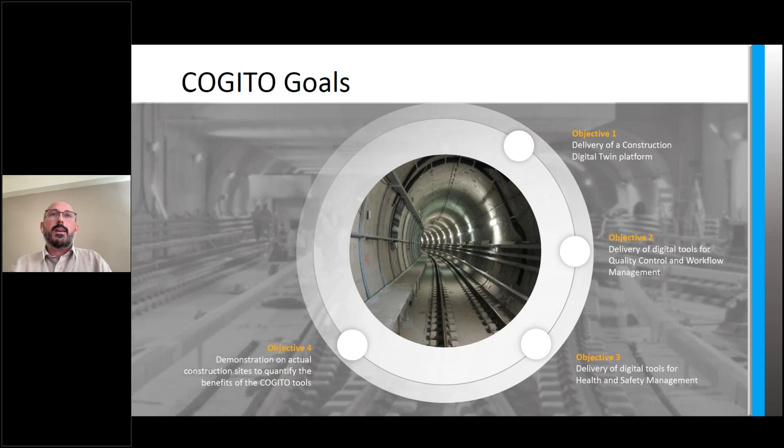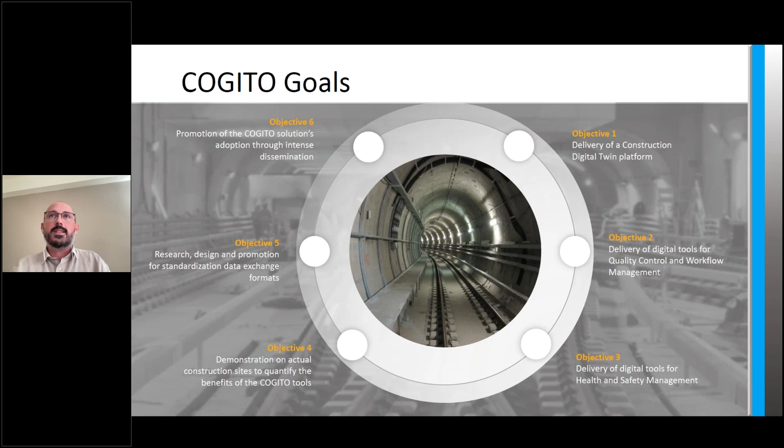Our missions have been to craft a digital twin platform powered by AI-driven quality control, workflow management, and health and safety digital twin applications, to demonstrate them on actual pilot construction projects, to pave the way for compliance with industry standards, and to extensively disseminate our achievements. To that direction, the conceptual COGITO architecture was developed. So let's delve deeper into the COGITO solution.

Actually, the COGITO solution hinges on several key components. The COGITO Digital Twin platform in the middle, which is the cornerstone of our system that masterfully manages data in adherence to the COGITO data model, ensuring seamless semantic interoperability among the various digital twin components. The multi-source visual and IoT data pre-processing modules on the left that transform raw reality captured data into curated information that is stored in the digital twin platform.

And on the right, the health and safety services that generate hazard detection rules based on design and planning, also issuing timely warnings to construction workers and equipment operators using real-time data. The quality control services which retrieve both as-designed and as-built data from the digital twin platform, expertly detecting defects and discrepancies using advanced algorithms.

The workflow modeling, simulation and management services that monitor and optimize construction processes in terms of cost and time. And last but not least, our rich graphical user interfaces and supporting applications designed to empower decision makers and streamline progress reporting for all stakeholders.

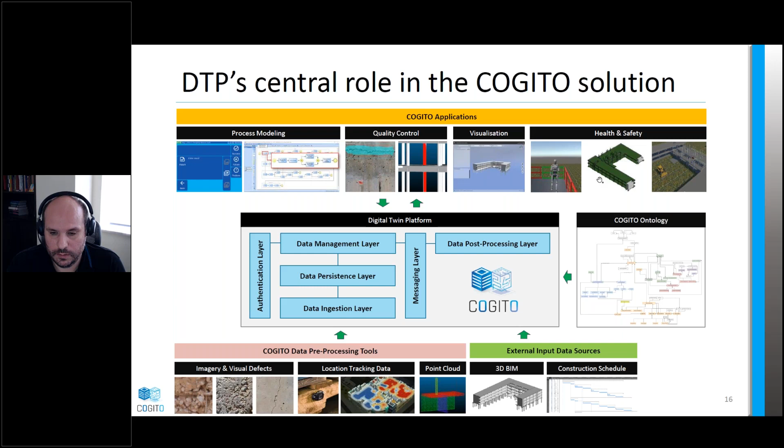So on the next slide, the overall architecture, as I said, has 6 core layers. Each layer contains software components. Here, the important thing to mention is that some of these components are standalone applications, but in the data management layer and in the data ingestion layer, we follow the microservice architecture. And in the data post-processing layer, through the messaging layer, we implement the service-oriented architecture in order to communicate with the COGITO tools.

The digital twin platform offers graphical user interfaces for users that have different roles in the COGITO solution. For example, the COGITO tool developers have access to the digital twin platform in order to register their own applications, to configure the APIs of their tools, and also to create, configure and orchestrate execution of the internal services, model checking services and data transformation services that the DTP offers.

Also, the project managers have their own access to the digital twin platform in order to create projects, to configure the projects, to assign users to the projects, and to load the input data. For example, as I said before, we have the BIM model, we have the construction schedule, we have IoT data coming from the construction site. So the project manager has the responsibility to load all this data into the digital twin platform.

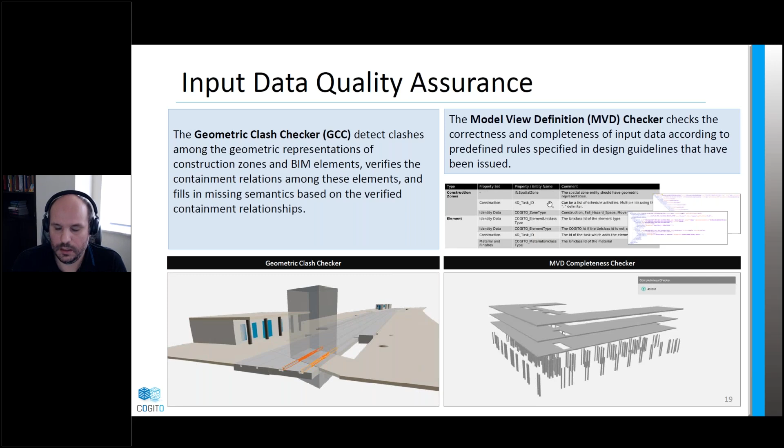The digital twin platform also offers a set of data transformation services. We have internally built an IFC optimizer that reduces the size of the BIM models, and this is super important when we have to deal with large models, because we can speed up the execution of all the data transformation processes and model checking processes.

We have also a B-Rep generator component that is responsible to create triangulated representations, geometric representations of the BIM elements. And this is important because we also offer in the COGITO solution connectivity with AR headsets such as the HoloLens, and it's important to have an optimized way to visualize the geometry in these devices.

The digital twin platform also offers a knowledge graph generator, an internal component responsible to transform all the input data, the BIM model, the construction schedule and this information into the knowledge graphs, and also to create the thing descriptions that are stored in the thing description directory. We have this technology that follows the Web of Things specification.

And finally, the BIM management component is a service that is built inside the digital twin platform and is responsible to provide the functionality for serializing, deserializing, querying, merging, splitting, and manipulating BIM data in general.

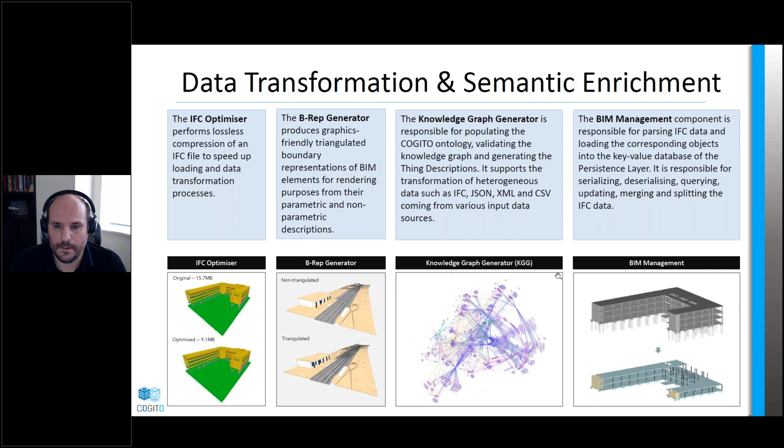Now, about the data integration and interoperability problem, the digital twin platform offers an extended way that we can configure our own scripts. So the digital twin platform offers a DT library that contains a set of reusable ready-made blocks, scripts, that are registered through the graphical user interface, and then the COGITO tool developer can create the modules based on these actors. So with an empty canvas, she can drag and drop actors in the module design platform and configure all the routes and the business logic of the module.

So this is, I think, the last slide. We can switch to the video for the demonstration. Yes, one moment.

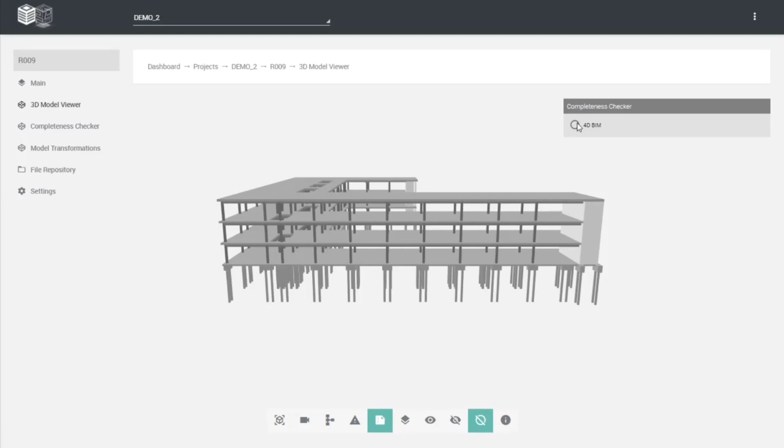When the annotation is finished and the execution is triggered through the status update, the DTP checks the quality and also transforms the data to the graph, RDF data, and also updates the graph. And here we can see a model checking. So we provide an error report for the elements that have missing properties. And this can help the designer to go back to the BIM authoring tool in order to update the properties.

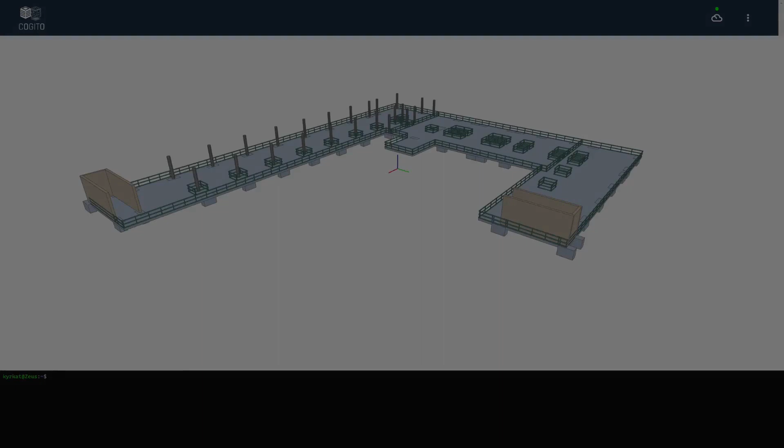Here are more complex modules. For example, this module is responsible to generate an IFC snapshot, a smaller IFC that contains only elements that are active for a specific period of time, that have active tasks. So applications such as the AR device, Unity applications that are installed in the AR devices, send to the DTP a time range, and then the DTP on the fly generates an IFC file, a BIM model that contains only the active elements based on the input time range. So this is an output, as you can see here.

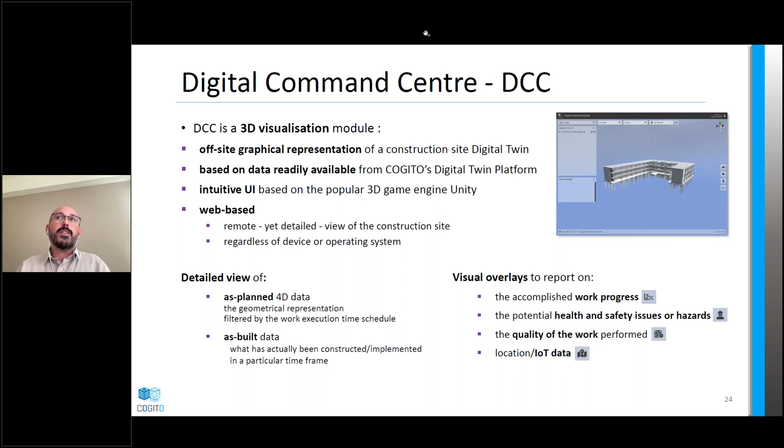DCC also offers visual overlays that report on crucial project aspects, including work progress, potential health and safety concerns, the quality of work, and location/IoT data. This means that the user can monitor and manage the construction project with precision, efficiency, and safety in mind.

Upon successful login and project selection in DCC, which we'll see later in a video, the user is presented with the main application layout as depicted in the left side screenshot of this slide. The main UI components available to the user are the filtering bar, allowing the application of filtering criteria, namely time interval selection for the as-planned and as-built data. The camera widget assisting the navigation of the user throughout the 3D model.

The element tree panel listing all elements available in the BIM in two alternative hierarchies. The element details panel populated upon BIM element selection, providing all available data properties and attributes for the specific element. The overlays selection, allowing the user to visualize available metadata on top of the rendered BIM elements. And the status bar providing information about the connection, the logged in user, and the DCC version that is running.

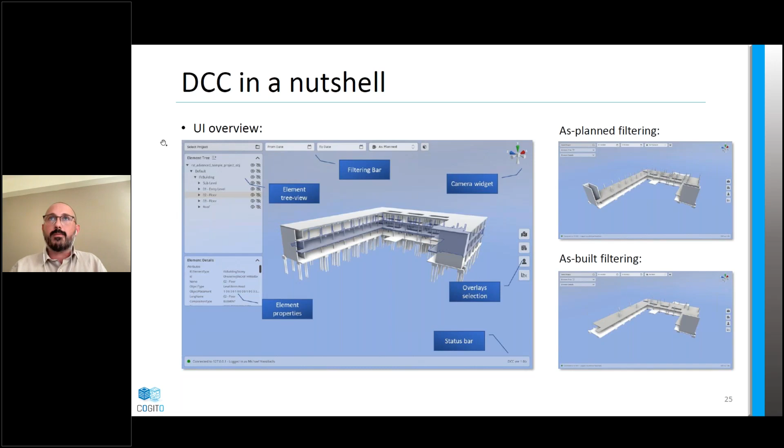The overlay selection buttons allow the user to enable or disable each of the four foreseen available layers corresponding to the data generated by the relevant digital twin applications and stored in the digital twin platform, namely the work progress COGITO tools, the IoT location data pre-processing tools, the quality control tools, and the health and safety tools.

The quality control and the work progress overlays have been discussed and presented in previous webinars, where the quality control overlay allows the user to visualize the results obtained via COGITO visual and geometric quality control tools, while the work progress overlay provides a quick, straightforward visualization of the project's current construction status. Upon application of that overlay, the project's BIM elements are color-coded according to their construction progress. The video that follows today focuses on the health and safety and the IoT overlays of our solution.

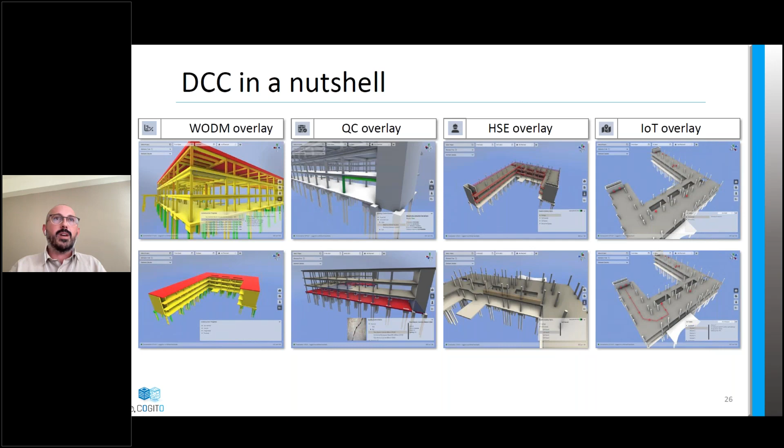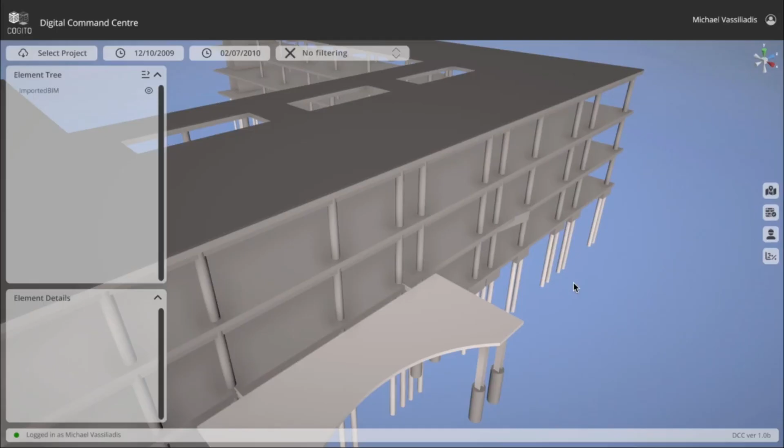The journey in DCC starts with a login modal window where the user enters his or her credentials. Then the user selects the project that he or she would like to view, and the DCC application starts executing the required conversion reporting operations. Upon successful login and project selection, the user is presented with the main application layout, where he or she can zoom in, zoom out, or rotate the building rendered geometry.

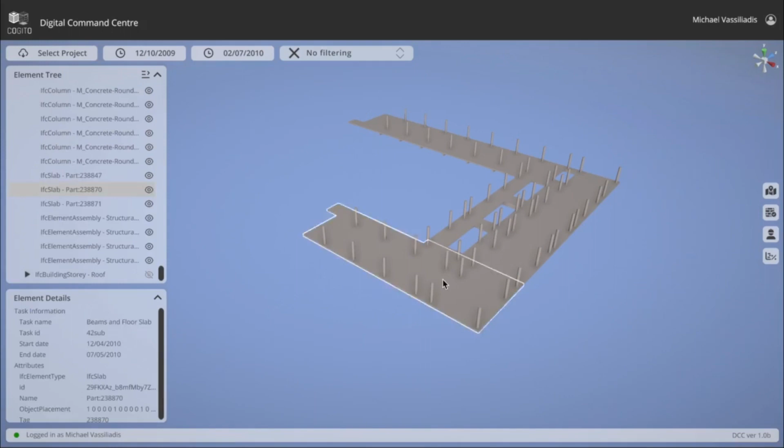A camera widget is always available at the top right corner of the screen, where, for example, clicking on the x-axis moves the camera to a side view. The element tree view on the left panel provides a hierarchical view of all elements grouped by story by default, and each item or group in the tree view has separate show or hide controls in the form of an eye button. Clicking those buttons hides or shows the corresponding elements in the 3D scene.

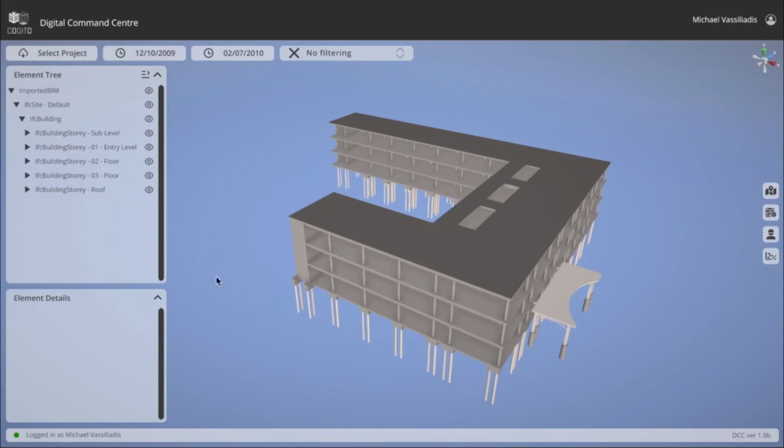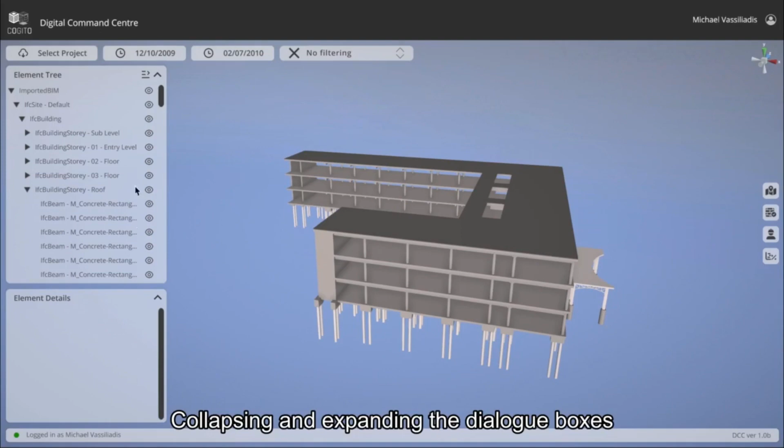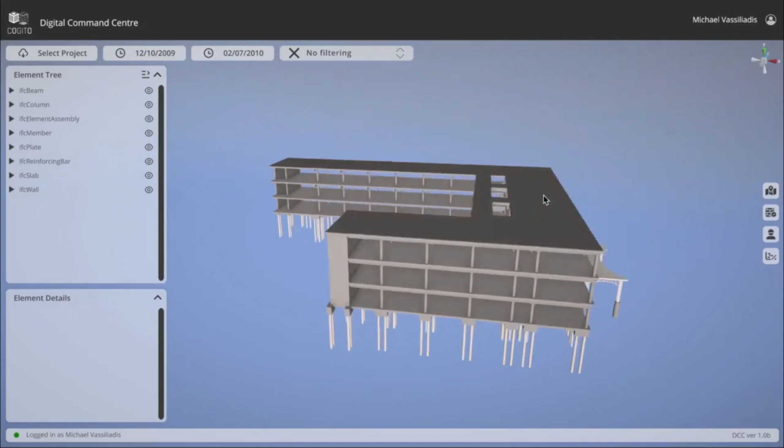Selecting an element, either by clicking on an item in the tree view or using the mouse in the 3D scene, will populate the element details panel. The latter includes a property table with all available attributes and metadata linked to the particular element. To avoid cluttering the UI, the element tree and element details panels can be collapsed or expanded as per user preference. The element tree panel also provides an alternate grouping mode by element type, where the user can toggle between the two modes using the header button. The expanding, collapsing, and showing, hiding functionalities remain the same for both grouping methods.

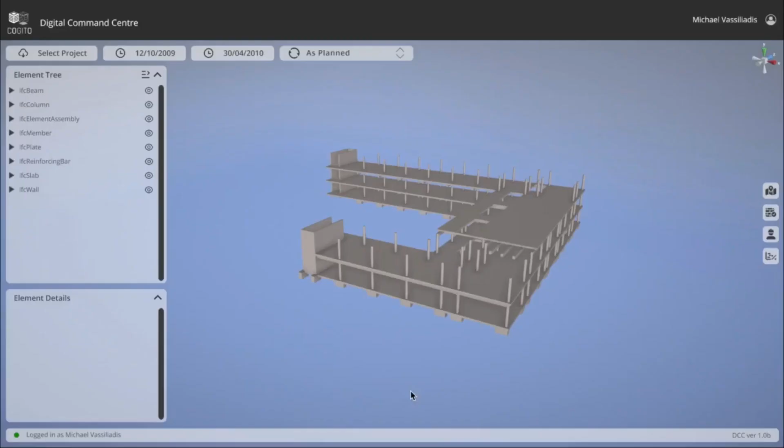At this point, I would like to mention that upon project initiation, no time filtering is applied. However, the user has the option to filter the displayed elements by date range, setting the start and the end dates, and selecting the as-planned data filtering to be applied. Changing the start or end dates, only the elements that have their as-planned dates within the selected range are shown.

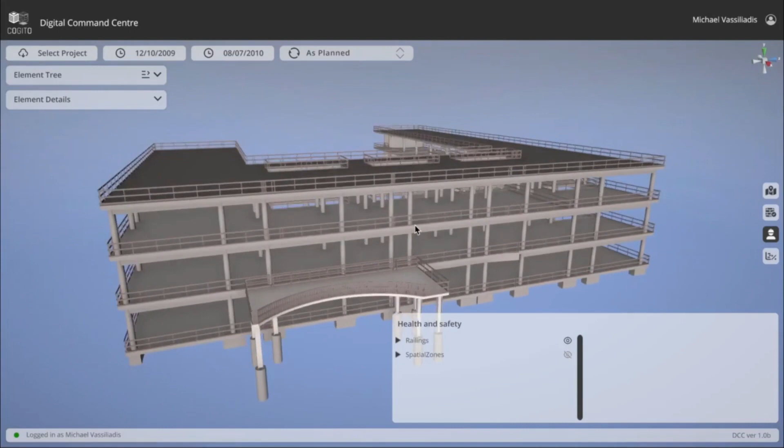For the health and safety overlay, actually, it makes use of the enhanced BIM file generated by another COGITO Digital Twin application called SafeCon AI and stored data in the Digital Twin platform. The relevant data fall under two main groups, safety elements like railings and safety zones that can be hidden or unhidden using the eye button.

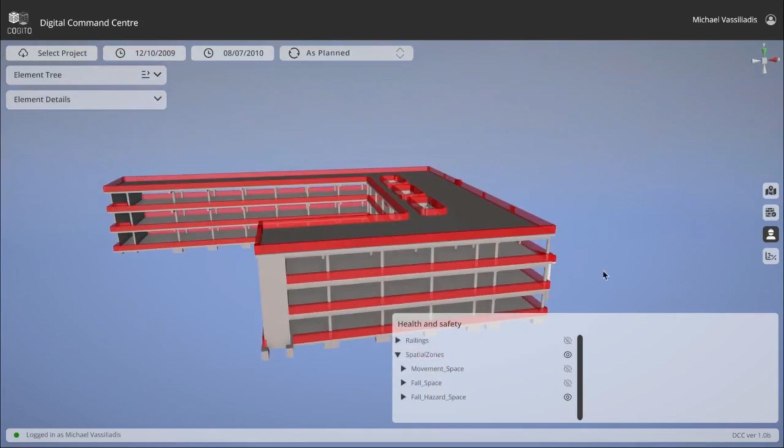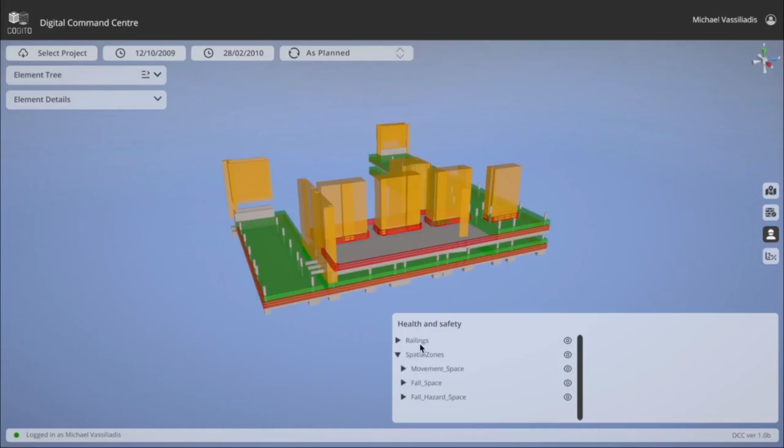The user can browse a list of various safety-related zones and visualize them that are further grouped into three main categories, namely the potential movement spaces, the fall spaces, and the fall hazard spaces. Upon their selection, they are rendered as rectangular bounding boxes that include the area of interest. As planned or as built time frame filtering could also be applied here, as we see.

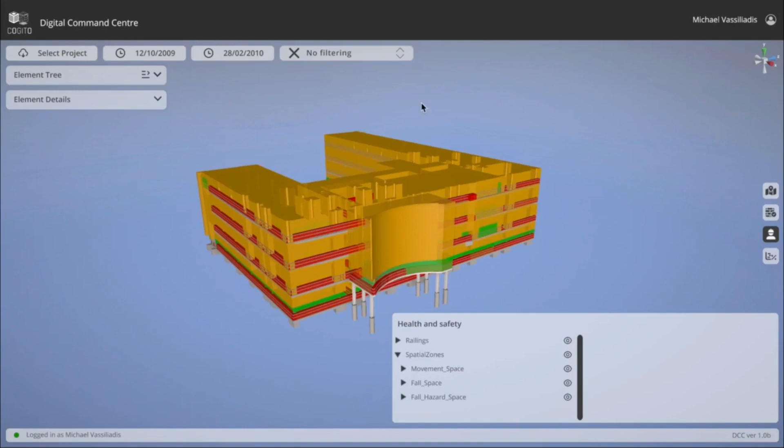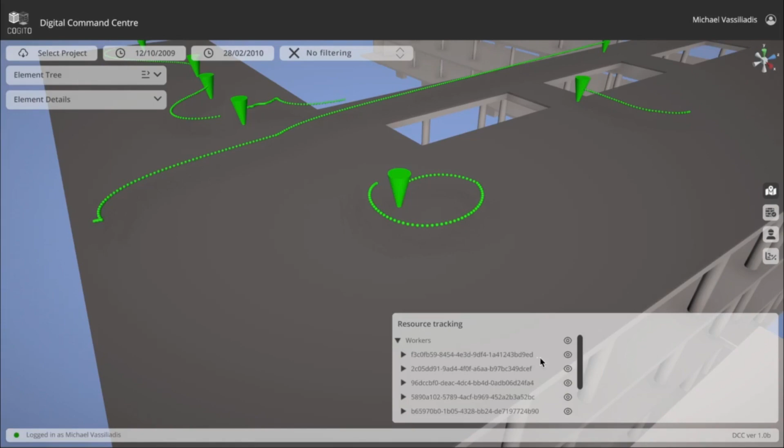So selecting no filtering disables any time frame filter, and clicking again on the health and safety overlay button hides any information relevant to that overlay. Click now on the IoT data overlay. The tracking of entities capable of moving within the construction site, namely humans and machinery or heavy equipment, is enabled. The available tracked entities are grouped by type and are displayed as 3D pins of different color per group.

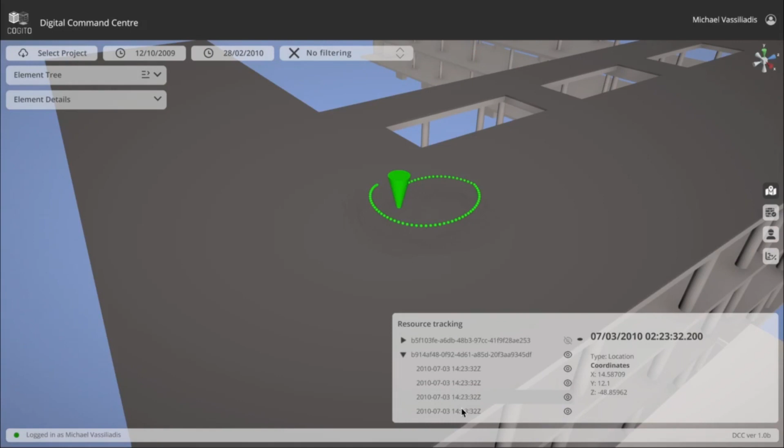The user can hide or unhide specific entities or groups of entities, and clicking on the left arrow at a specific element, check the coordinates of each location of the specific entity, as they have been tracked by the IoT data preprocessing module of the COGITO solution and stored in the Digital Twin platform. And this concludes the demo of DCC prepared for our webinar today.

Thank you. Thank you very much, Giorgos. Perhaps the first question for you is if you can elaborate a little bit more on the technology stack used to develop the digital command center module, and specifically how it integrates with COGITO's digital twin platform. Yes, sir. Thank you. Thanks for the question.

Actually, as Kyriakos mentioned, apart from DCC, there are other applications that were developed using the Unity game engine. So targeting a common look and feel end user experience within COGITO, at first we developed the COGITO Unity library, which is actually a collection of C# scripts delivered in the form of a Unity package. This library provides methods to obtain the IFC file and convert it to mesh type files with accompanying metadata, enable the communication between the digital twin platform and applications that use the COGITO Unity library, and all the functionalities that were demonstrated in the previous video.